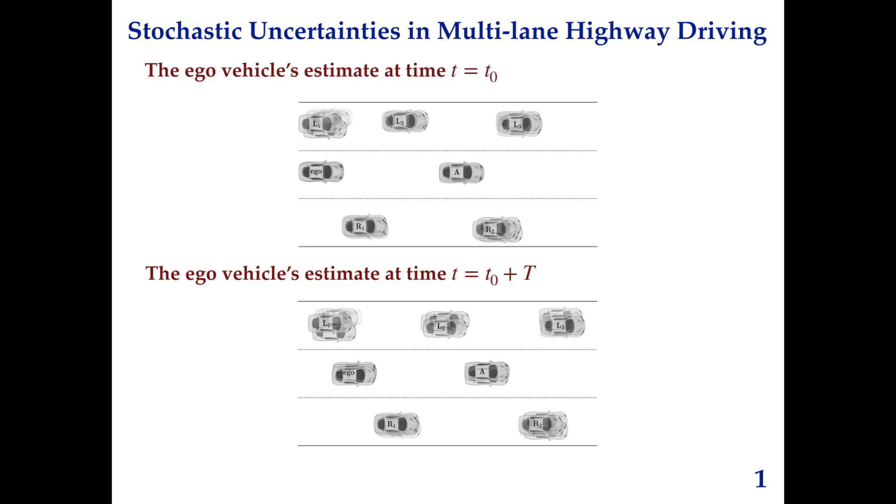As we can see in the lower image, these estimates are time varying and the ego vehicle can predict the states of all the vehicles at any time during the time horizon t. In this paper, we represent the time-varying stochastic uncertainties in the states of all the vehicles as time-varying joint PDFs.

We have two main contributions. First, we propose a framework for non-parametric prediction of PDFs using characteristic ODEs. And the second contribution is performing feedback synthesis for the ego vehicle's stochastic states.

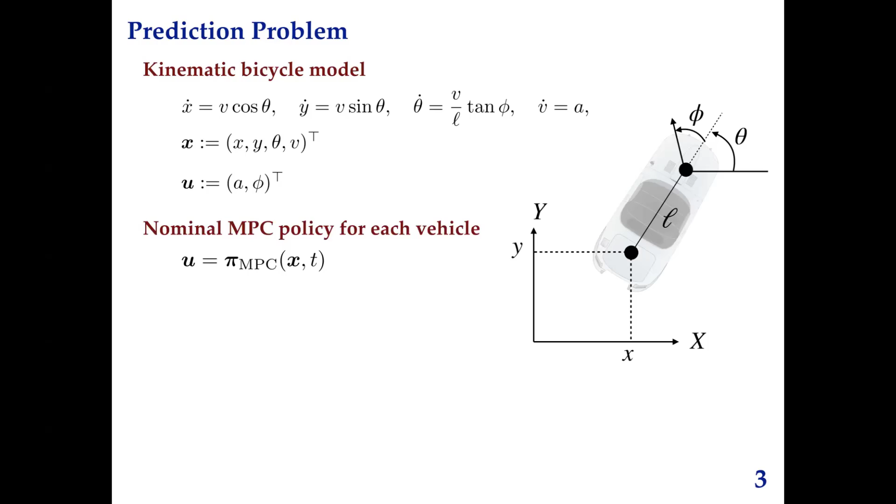We assume all the vehicles follow the kinematic bicycle model, which has four states: XY position, heading angle theta, and V, which is the velocity, and controls are acceleration and steering wheel angle. We also assume that each vehicle closes the loop with a nominal MPC.

And at the beginning of the time horizon, the ego car will receive the data to estimate its own and the other vehicles' states. And with this information, it wants to predict where the states' PDFs would be in time t.

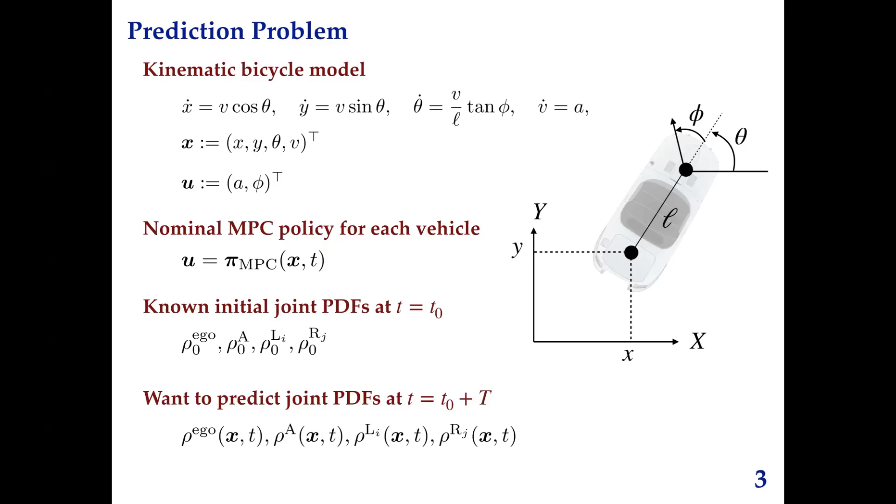Here is an overview of our work. With the initial state PDFs for all the vehicles at time 0, the ego car predicts the joint state PDFs over the time horizon. Then we calculate XY marginals and use them to get collision probabilities and the safe target PDF. And then we design and apply the optimal feedback steering on the ego vehicle to reach that target PDF.

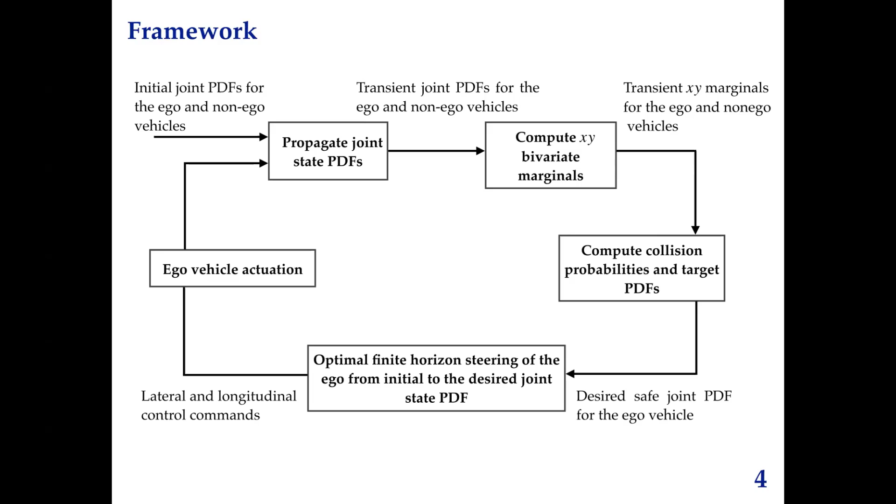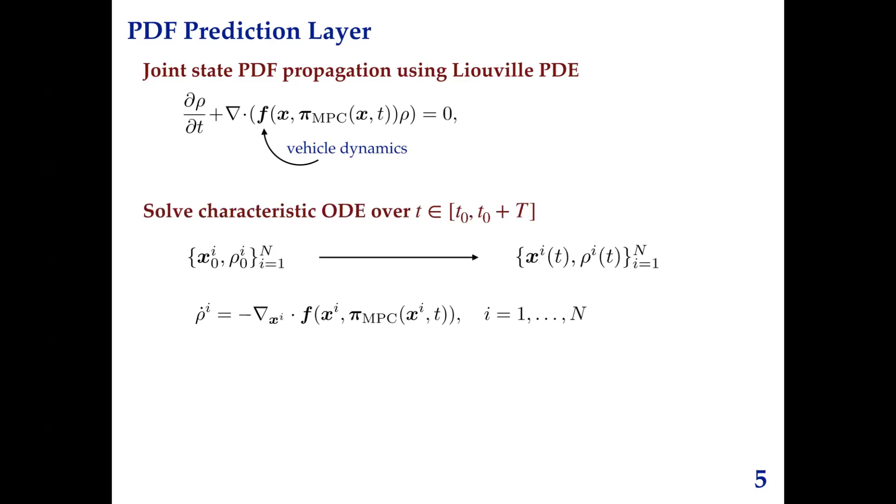The joint state PDF of each vehicle satisfies this partial differential equation called the Liouville PDE, which depends on the closed loop dynamics. This is a first order PDE and can be solved using the method of characteristics. Capital N here is the number of samples.

This PDE gives a probability weighted scattered point cloud evolution, and we are not making any grids. We also do not approximate statistics or dynamics, and our nonlinearities are exact.

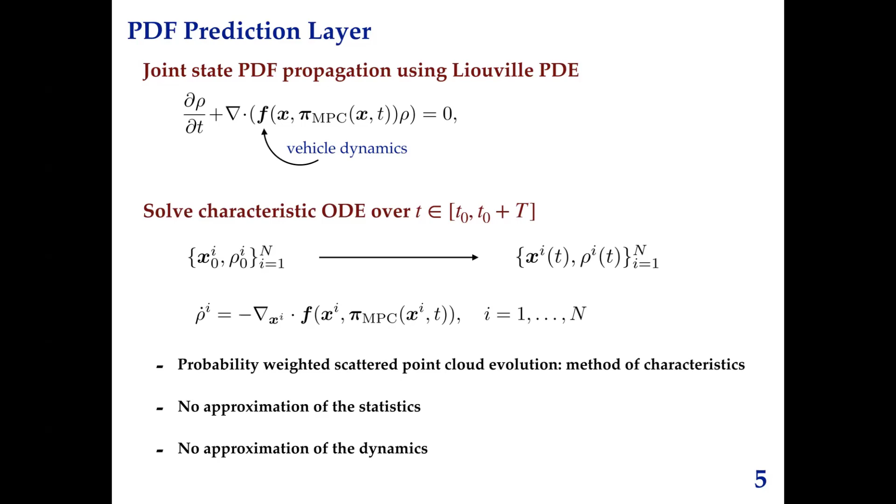From the joint PDFs we obtain from the method of characteristics, we then compute the univariate and bivariate marginal PDFs in XY coordinates. And here are some simulation results. In the left image, we have propagated Y marginals, and on the right, the X marginals over time for the same highway driving scenario that we introduced at the beginning of the presentation.

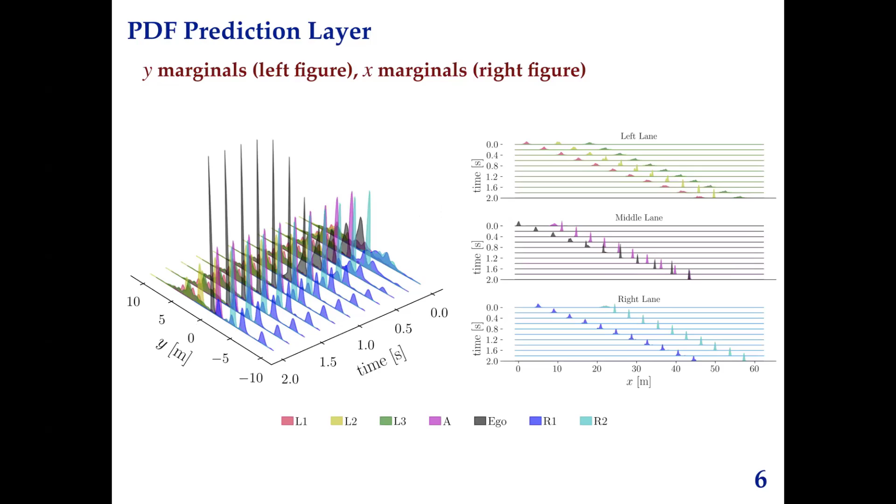So we use this data to calculate the collision probability for each combination of the non-ego cars, and it would tell us what is the safest option, or what is the desired PDF for the ego car to be.

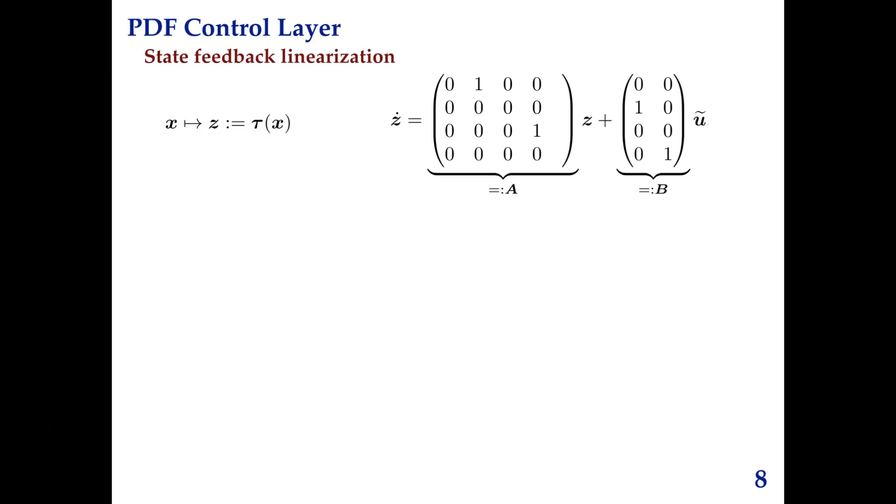Now, we need to design a controller to take the ego car from its initial joint PDF to the desired PDF at time t. Taking advantage of the feedback linearizable structure of the dynamics, we can design our controller in the feedback linearized form. And here is our stochastic optimal control problem.

Here we want to minimize the expected value of energy, or U tilde, over the entire horizon with respect to the controlled joint state PDF, subject to the Liouville equation, satisfying the initial PDF as well as the desired PDF condition at final time.

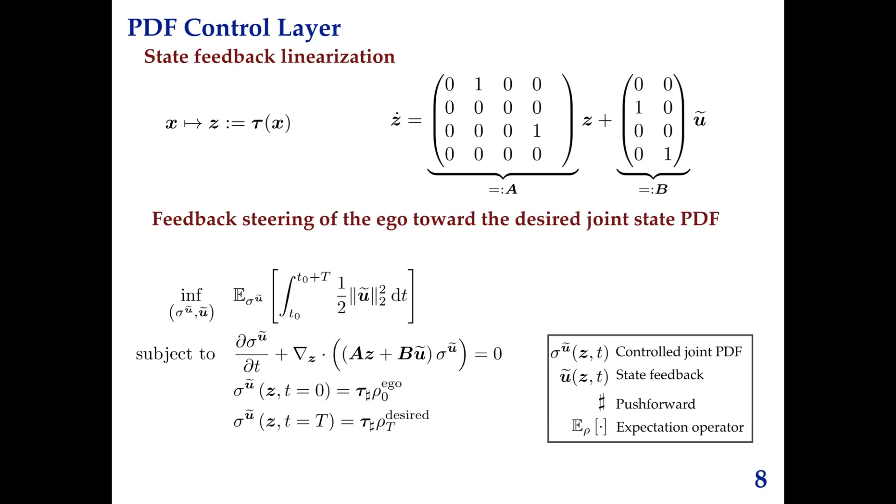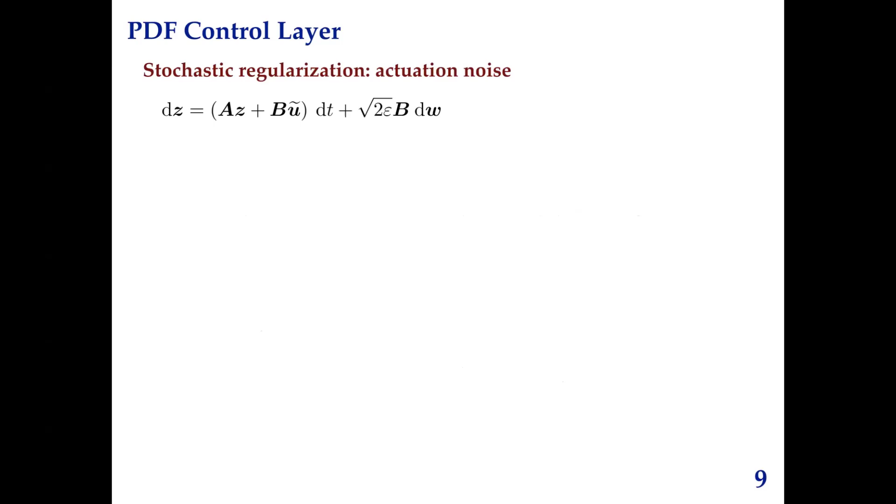To help our calculation, we add a stochastic regularization, or a stochastic noise, to our system. And the stochastic optimal control problem takes this new form. As you can see here, our first condition has changed, and it actually turns out that this Hessian, which is a second order term, will make our problem numerically easier to solve.

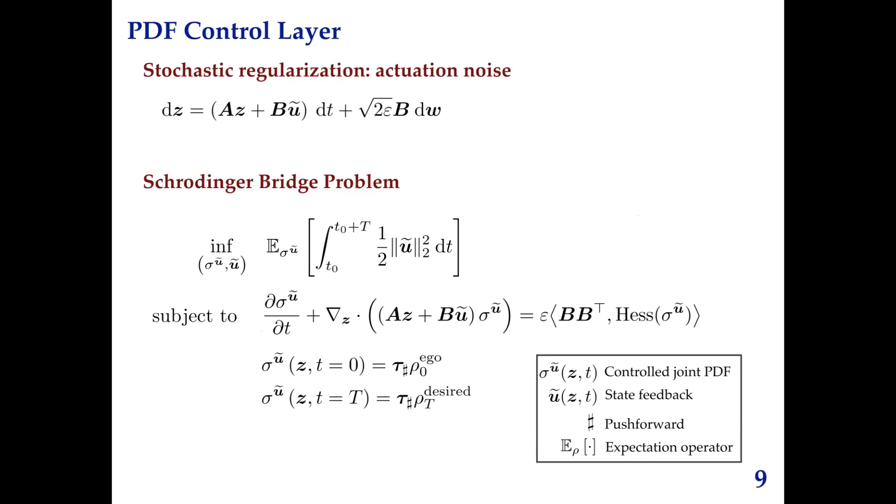The solution of our problem, which is the optimal controlled PDF and also the optimal energy, can be obtained using functions phi and phi hat, which follow these integral equations. And here kappa is the Markov kernel.

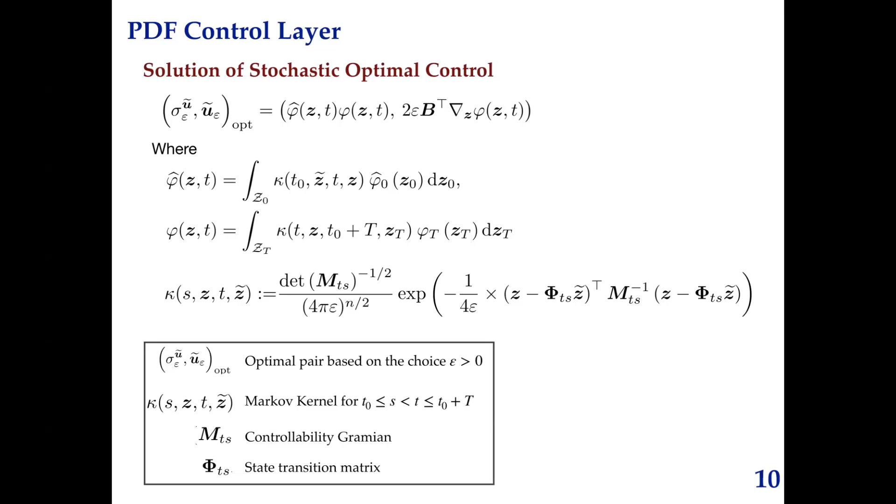With the known kappa, in order to find phi and phi hat, which will basically give us our optimal solution, we need to solve this contractive fixed point recursion. At the end of this recursion, the converged values, phi0 and phi0 hat, will help us to find phi and phi hat on the previous slide, and basically we can find our optimal solution, which is the controlled PDF.

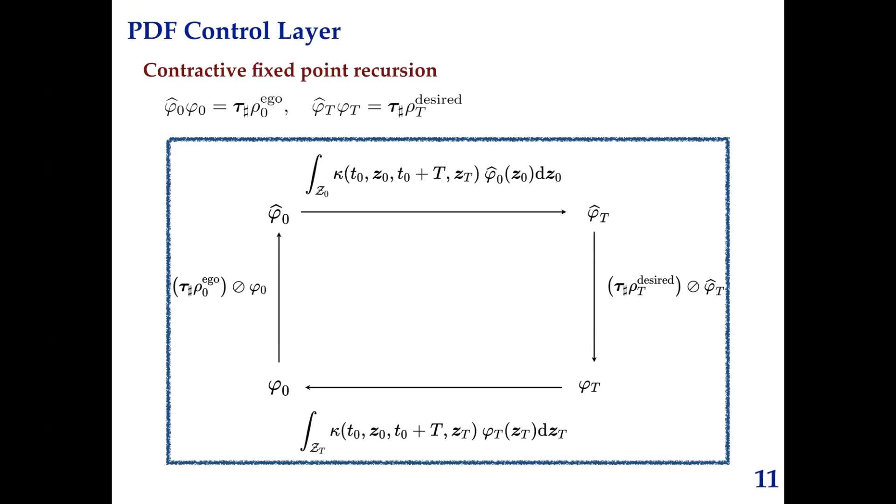Now, back to our driving scenario. According to the collision probability calculation that we did, the gray PDF in the middle of the upper image is our desired PDF, or basically the safest states PDF that the ego car wants to reach, which is between the cars R1 and R2 in the right lane. And the lower image shows that by applying the optimal feedback control, the ego vehicle can reach that desired state.

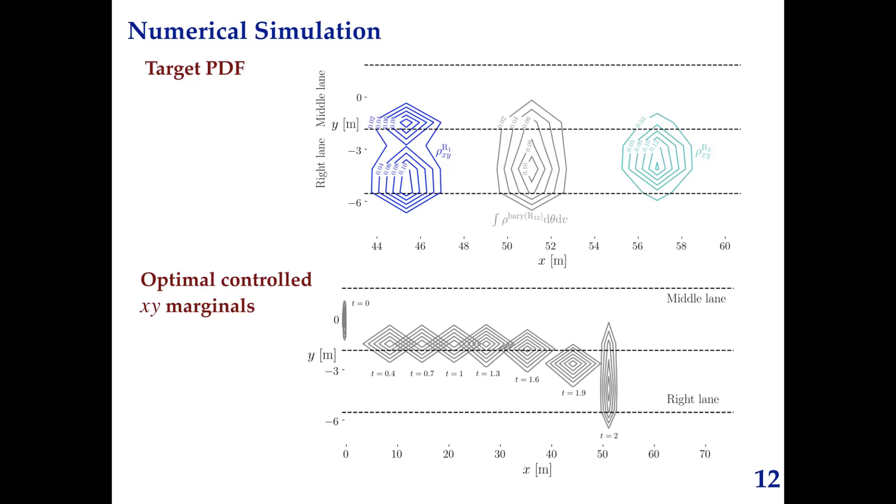And here is the summary. We first calculated the time-varying non-parametric joint state PDFs for all the vehicles on the highway. Then we compute the safest terminal PDF for the ego vehicle to be, and then we apply the feedback synthesis for the joint PDF steering for the ego vehicle to reach that desired PDF.